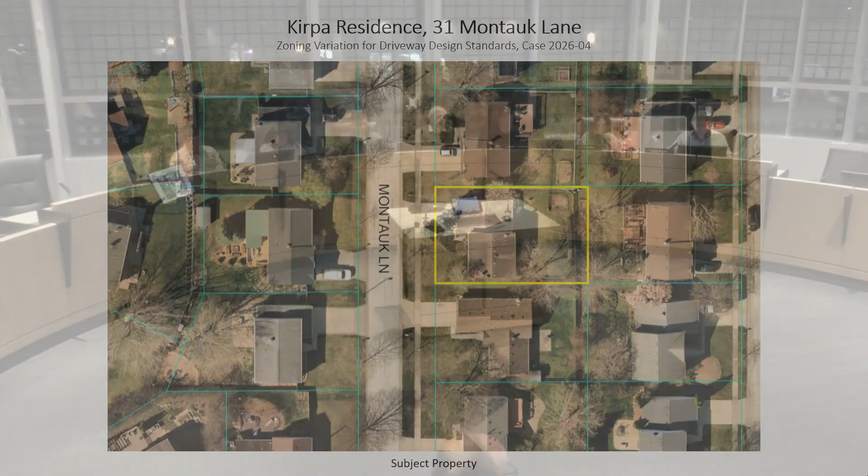We'd ask that you first tell us who you are, give us your names. So I'm Aga Lukawiecka. I am a part owner of AGSI Carpentry, and that's my husband, the other owner. And then I'm also the daughter of the owner of 31 Montauk Lane. I'm Barbara Kirpa, the owner. I'm Daria Mangas, architect.

Not that easily. And we have also looked - I think we were more prepared to show the homes that have a higher FAR, so we did prepare an exhibit that shows, just in the vicinity, there are multiple homes that do have that.

Just one quick note from the staff report on that point. When the petitioners presented this exhibit, I did look through our records and the county records to try to determine why there were so many homes that exceeded the FAR already. I'm not 100% sure, but based on the construction date of the houses in this neighborhood, they appear to predate the FAR requirement in the code.

So the FAR requirement is about middle of 1982, and many of the homes here were built before that. That is my best guess as to why certain models exceed the FAR even before any additions were done.

So we tried to pull some records. It was just hard to get an exact answer on the FOIAs. The only one we could get kind of an idea for was the one Aga was talking about. I asked for the current square footage of these homes we were looking into, and I was told the Village doesn't store that information, so we were told to look on the Lake County website map.

Yeah, that is true. On the Lake County website, the property cards will tell you what year they're built. Can you give me that address again on Manchester? Oh yes, 27 Manchester Lane. Okay, thank you.

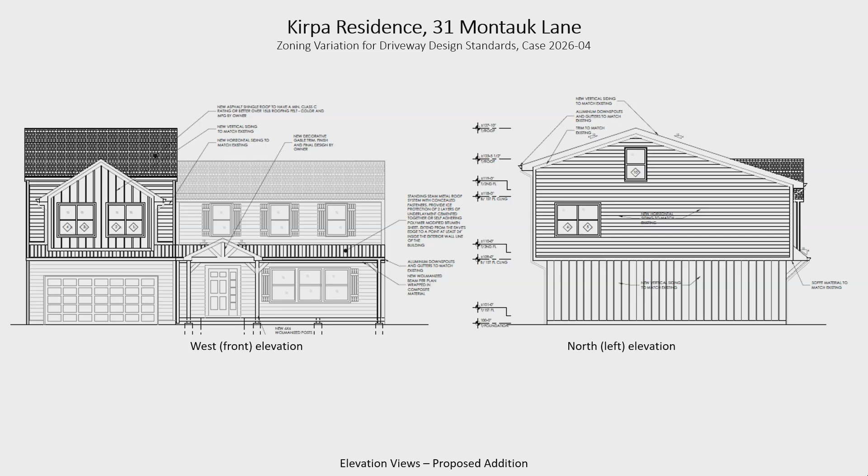The square footage of my home and your home are the same. Do you have an attic above the rest of the house, like above the bedrooms? Yeah, but it's very low, so we're trying to see if we can have storage where we can actually walk into and not have to be cramped.

We have an attic now on top of the garage that you can walk into and store more in, but it's low. Do you have a basement? I do have a basement. We don't have one, we have a crawl space. I was wondering when you said attic above the garage, maybe you didn't have one, but it's just a low crawl space.

Okay, thank you so much, that's why we're trying to be a little more comfortable with storage space. All right, thank you. Any other comments from the public? If not, we will close the public comment at this point.

Since this is your petition, you get the last word. Do you want to respond, please? What you should respond to is the consideration of other options, the single-family home assurance, as well as the issue of the roof line, which has been discussed previously.

Can I say something, please? So the hardship, the reason we're doing this, is obviously the market is absolutely insane. If you want to get a house with 4 or 5 bedrooms, you've got to be at least $500,000, if not more. Plus the rates right now are also through the roof, so we can't afford a house with that kind of mortgage at the moment.

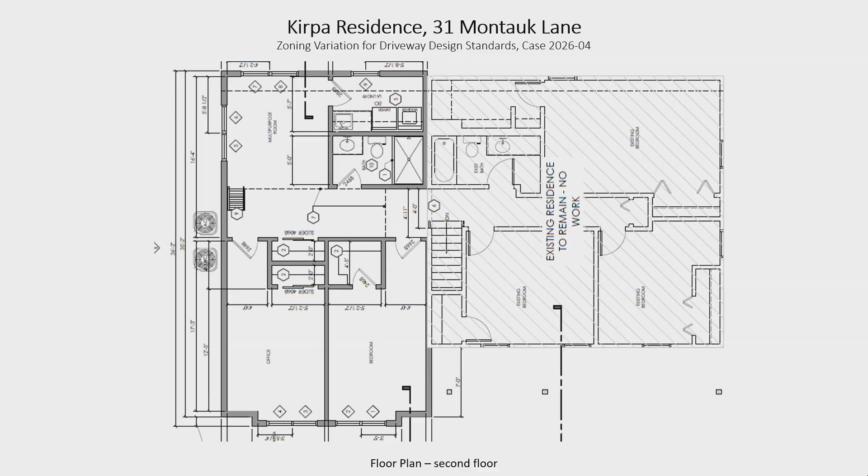Okay, so in the attic area, is the roof above that insulated? Yes, the roof above the whole house is insulated due to current energy codes.

It looks like it's 11 and 3/4, times about 19. So it's 223 square feet, the storage, in round numbers.

And the other one is... I mean, if this is the only thing that's going to stop us from an addition, we can close the whole thing off and just have it be attic storage. That's not like a 300 square foot game changer for us. We're more focused on the bedrooms and the bathroom downstairs.

Okay. Any other questions? Anything else you'd like to add? I was just saying that if that's going to stop us, then we can close it all off. Nothing else.

So did we decide that changes what the petition is? I can't off the cuff, just without reading all the code definitions that relate to this, say for sure. I don't want to hazard a guess.

So what we would do is, any motion we would make would have to be conditioned upon a finding to be supplemented by staff with respect to a verification when viewing the attic and the loft storage and attic storage, whether it is part of the square footage for FAR purposes, because that would affect what the floor area ratio would be.

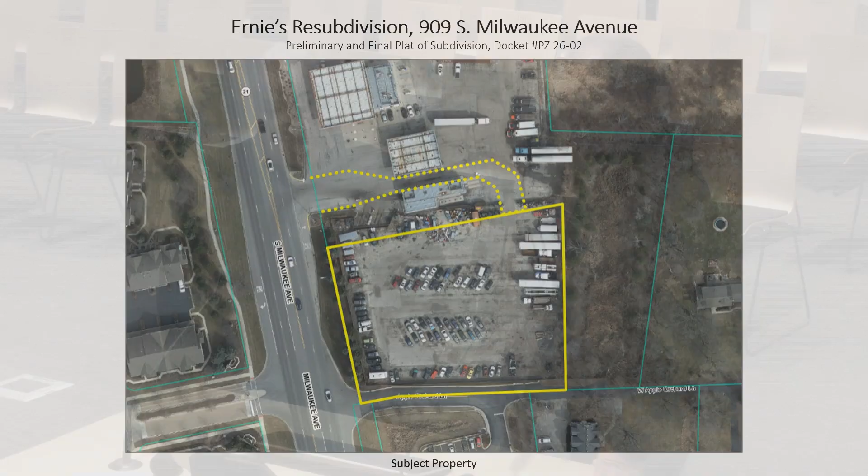The property south of the car wash, we started looking into - we were talking with the fire department and were pretty close on that deal, then they changed direction, as you probably know, and went further south. But that started opening up some thoughts with Ernie and his family, and he's now been approached by a few people. He's been basically truck parking there for the last dozen years or so, a long time.

So the thought was to maybe consider selling. Nothing's been signed or anything like that, but we've been approached by several parties. In order to do that, we started talking to Andrew probably 6 months ago, last summer or so, about the possibility of subdividing the 6.4 acres into two parcels. The main parcel would still be known as parcel 1, and the southern parcel would be parcel 2, which is 1.7 acres of vacant land.

We initially proposed a drawing that had a slight variance, but with recommendations from our counsel and Andrew, we thought it was better to come before the board with no variance request. So we made a few alterations, and what you're looking at now is an opportunity to create a subdivision of that one parcel into two parcels.

Roughly 4.4 acres and 1.7 acres of vacant land. The best thing that would happen with this, versus if that was ever sold out, for example with the fire department, we were going to have another access point on Milwaukee Avenue and potentially another off Apple Orchard. At this point, the proposal is that access for the 1.7 would remain the two entrances on Milwaukee Avenue, so we're not asking for any additional entrances.

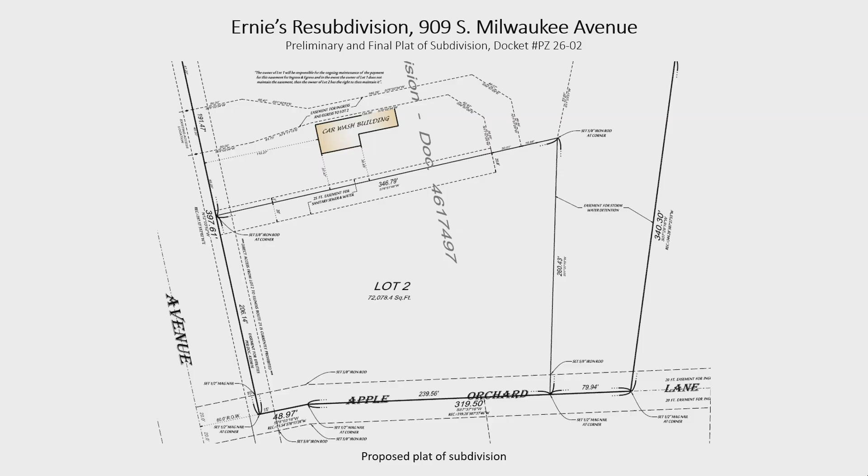Okay, any other questions? If not, we have a standing motion to recommend approval, which would be approval of the preliminary and final plat of subdivision in accordance with the development ordinance, to facilitate a subdivision of land establishing a 72,078.4 square foot lot, which is 1.65 acres, for the property commonly known as 909 South Milwaukee, along the dedication of access and utility easements as illustrated in the plat by R.E. Decker, dated December 19, 2025, subject to the following condition of approval, which is very important: the plat may be modified subject to the review of the village engineer and attorney. You ask, why is it important? Your plat has a specific legend on it referring to the Condominium Property Act and common elements. I don't believe this is a condominium. I don't believe there are any common elements. So your plat of Ernie's re-subdivision is going to have to be corrected and fixed.

Thank you, commissioners and staff. It's wonderful to see some of you again. I'd like to orient us back to the site location at the top northeast quadrant of the mall campus, to the Hawthorn Townhomes. We'd like to thank the Planning and Zoning Commission for the thoughtful feedback provided during the January 21st hearing. We have carefully reviewed the topics we discussed and have refined our site plan to ensure the project better aligns with the safety and traffic goals of the community. Each of our consultants will dive in further, but I'd like to offer a roadmap of what we'll be covering today.

These are our four program updates. The first being the Building 9 egress and ingress. We'll show a building update for the new buildings 9A and 9B. Topic number 2, rear-to-rear alley offset parking and parking ratio. We have a better visual and understanding of why this is important to us. Number 3, the AMC median planting and irrigation update. And number 4, the sidewalk connectivity and grade transitions.

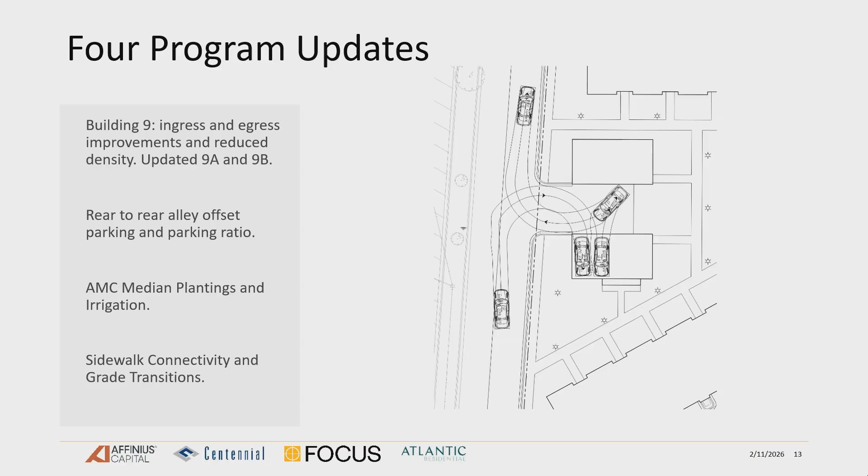Going to program update number 1, Building 9 ingress and egress improvements. The Commission expressed concerns regarding the safety of vehicles exiting directly out of Building 9 onto Hawthorn Center AMC Drive. Specifically, the design utilized 3 reverse exits, which presented potential visibility and traffic flow concerns for that roadway. As shown, this revised site plan contemplates a central drive aisle, which is 24 feet wide, between a new separated Building 9, hereby named 9A and 9B. This modification will increase sight lines, improve vehicular and pedestrian safety, and internal maneuverability.

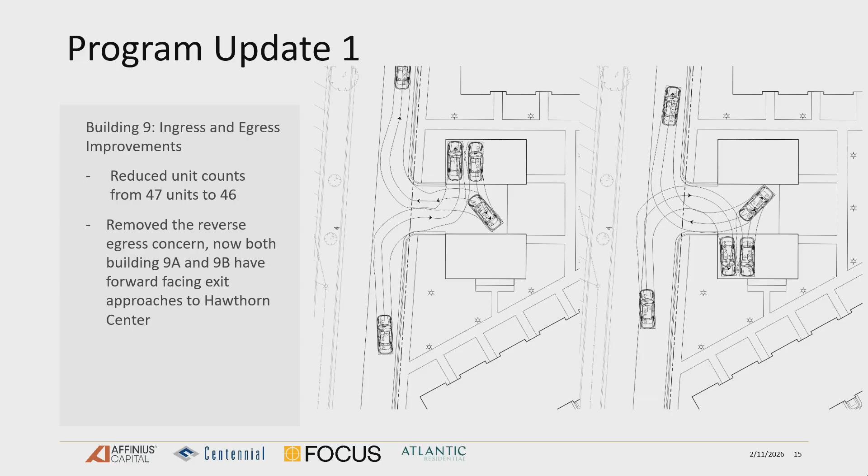In short, we will be able to use the center drive aisle to maneuver so that all reverse movements occur on the townhome property itself. This plan revision will also alleviate the concern expressed by some of the commissioners that the garages open directly to the AMC drive. These garages now face inward to the shared drive aisle, conforming with the design of the other townhomes in buildings 1 through 8, which also face inward. I will now hand this off to Jeff Mulcrone, who will talk about the architectural updates to Building 9A and 9B.

Good evening, commissioners and staff. As Sheila mentioned, we took the 3-unit building that used to be there and separated it into 2 individual row homes, so the middle unit is gone. We now have these 2 homes essentially on the site. When we did that, we had to look at the architecture as well to make sure these function well and are aesthetically pleasing towards the west. What you see on the screen here are the elevations that would face the west. Normally in the past, those would have garage doors on that face, so we turned the garages 90 degrees, and now the garage entrances are on the side, and the garages face each other. Presenting to the streetscape are now some small windows into the garage. This presents a nicer streetscape architecturally for that fenestration there.

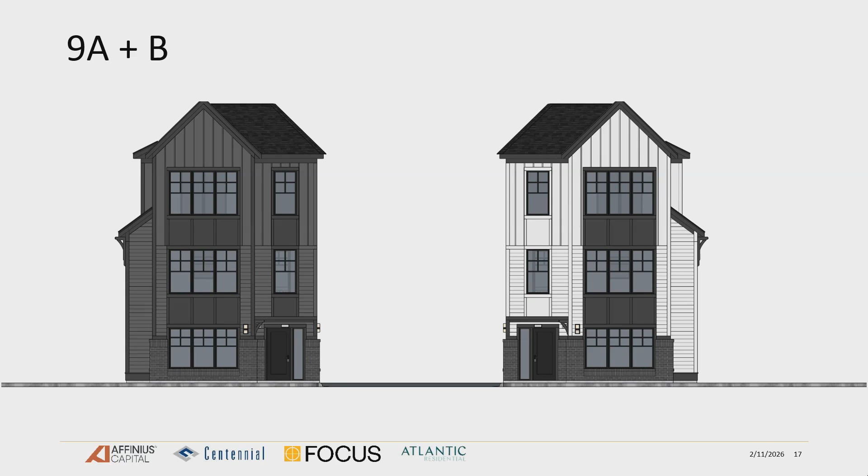And this is the east side of the buildings that faces the internal courtyard and park. It's very similar, all the architecture is substantially similar to the existing design that was presented last time we were here. Same materials, same color palette, it's just the architecture is a little bit more refined to create these two unique homes on the site.

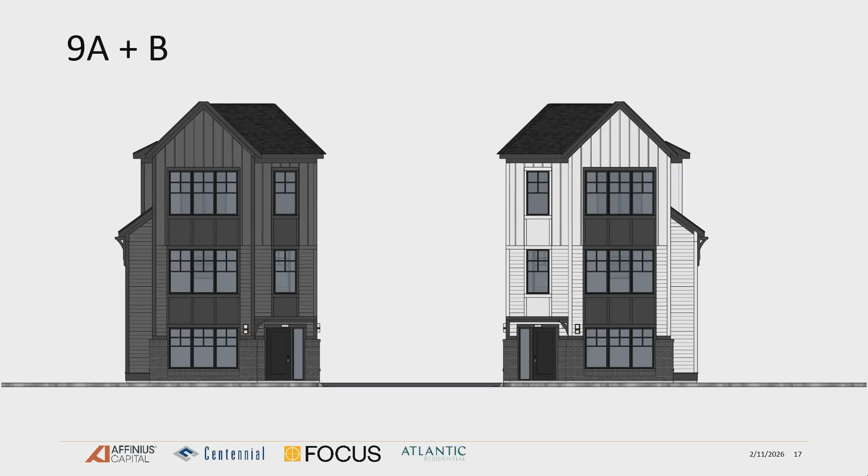While you're on this one, do you happen to have the separation between the 2 buildings? I believe we're 24 feet. 24 feet? Yeah, so there's enough room to back up and maneuver and then drive back out.

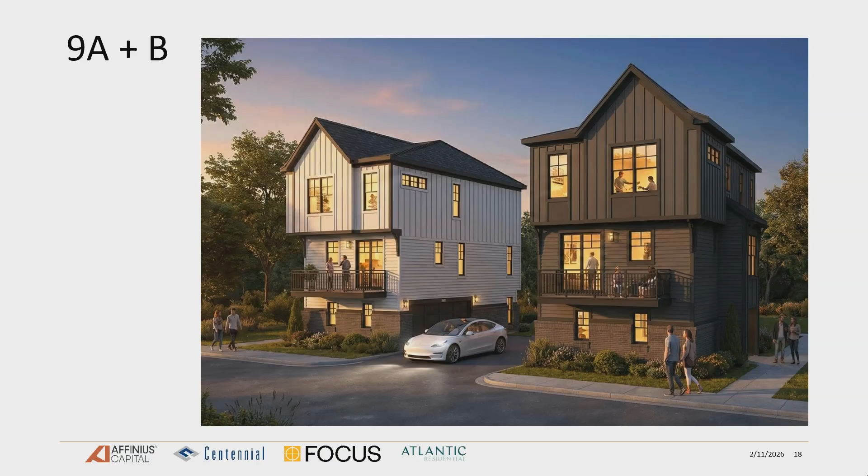And how many units are in each of those buildings? It's just one unit. It's a 3-story single unit, so it's essentially a home. There's 2 units there, so we did drop 1 unit. So you're now at 46 for the property. Is it 46? 46. Yeah.

And the balconies on both of these face the AMC parking lot versus the grassy areas internally? It's just the way the units are designed. So on that middle floor, these are normally like a rear load unit, and so those balconies are off the kitchens, which are to the rears of those plans, yes.

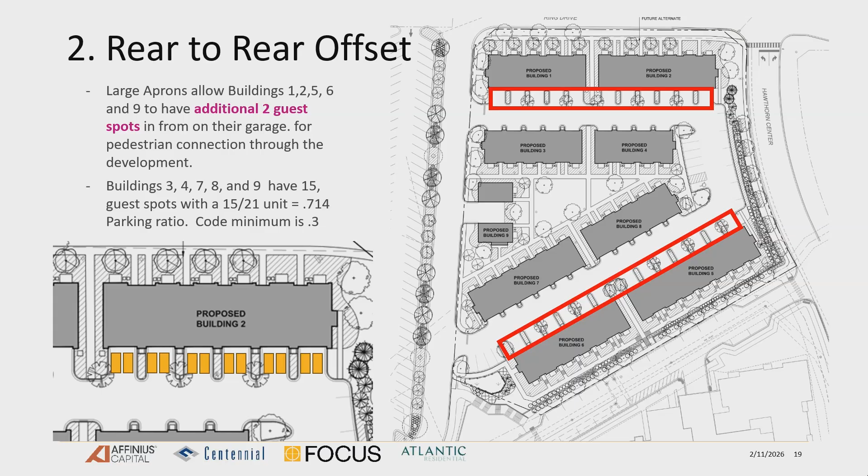One question - looking at the graphic, it says large aprons allow buildings 1, 2, 5, 6, and 9 to have 2 additional guest spots, and then it says buildings 3, 4, 7, 8, and 9 - 9 is listed twice. Yes, good catch. It should only be in the second one, that's included in those 21 units. Yes, you got a sharp eye.

Good evening, I'm Catherine Talty, landscape architect, and I'd like to address the median that runs between the development and the AMC Theater. We discussed this at the last meeting and talked about the durability of the plant material intended for that area, so we reevaluated the species that were specified, and importantly, the fact that we were leaving some areas of turf in the median, which raised concern about the health and vigor of that plant material if we were not to irrigate.

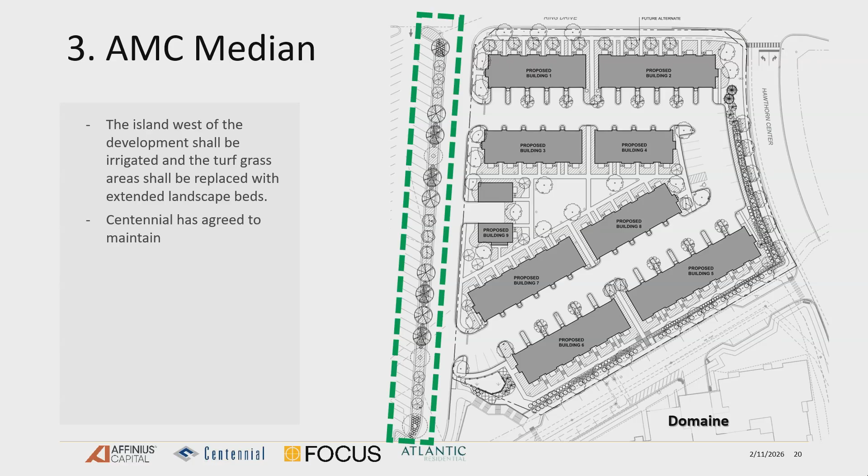So we reevaluated the plant species and specifically chose ones that are very durable and drought tolerant - native grasses, hardy perennials, and a few woody shrubs that can tolerate this environment. We feel confident with the plant palette, and Centennial has agreed to maintain the median to make sure the landscaping remains healthy and viable. Though we feel this could survive and thrive without irrigation, the developer is open to the idea of irrigating that median.

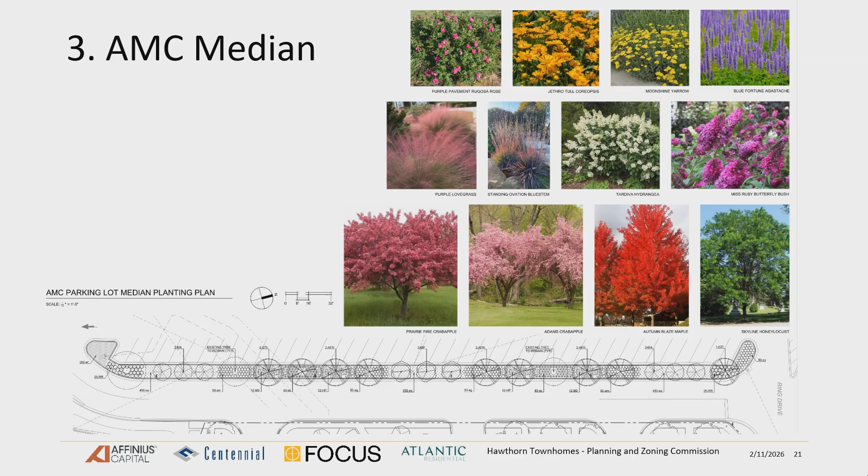How wide is that median? It's actually fairly wide - I believe 12 to 15 feet. Is the island crowned at all, or is it flat? It's crowned. And we're going to essentially rebuild that grade once these are installed, so we'll maintain our place and the soil.

What does 'open to' mean - are they going to irrigate it? We had put a note in the staff report on this, which is one of the questions I had in reviewing the supplemental materials. The note just indicates that the mall would agree to maintaining it. If this development were to put it in, it would be fed off the mall and become the mall's maintenance responsibility, since it's fully on their property. So rather than have some other agreement requiring them to go off site, the mall would agree to take it on.

Any other questions? So they're maintaining it, but if something dies out, who's replacing it? Centennial has stated that they will take full ownership - winterization of the irrigation, power for the irrigation, and tapping off their own water line for that irrigation as well.

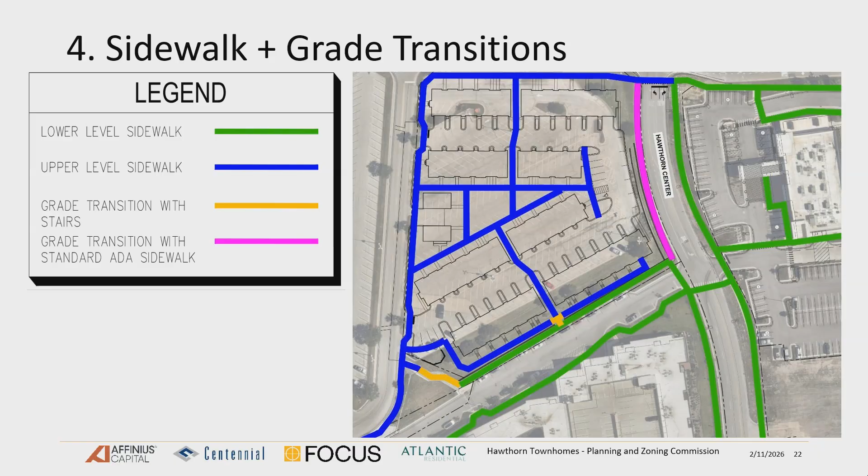Can you confirm again that it's the southwest corner of Mall Drive and Hawthorn Center where that radius is being pulled back? Yes, that'll be the same. The radius is increased, and we did truck turning movements for that one as well. That won't impact any of the sidewalk - we're redoing the sidewalk up there anyway.

Okay, anybody else? Anything else on your behalf? I think so, thank you. This is a continued public hearing, so if anyone from the public wishes to speak, this would be the opportunity to do so. Seeing no rush to the podium, we can close the public hearing portion.

Andrew, maybe you should confirm what's actually before us versus what we've already decided. Can I ask a question first? Sure. Tim, I think that was your name - you presented an image of the garages. I'm not sure what you were proposing in that picture. Were you proposing a signage change there?

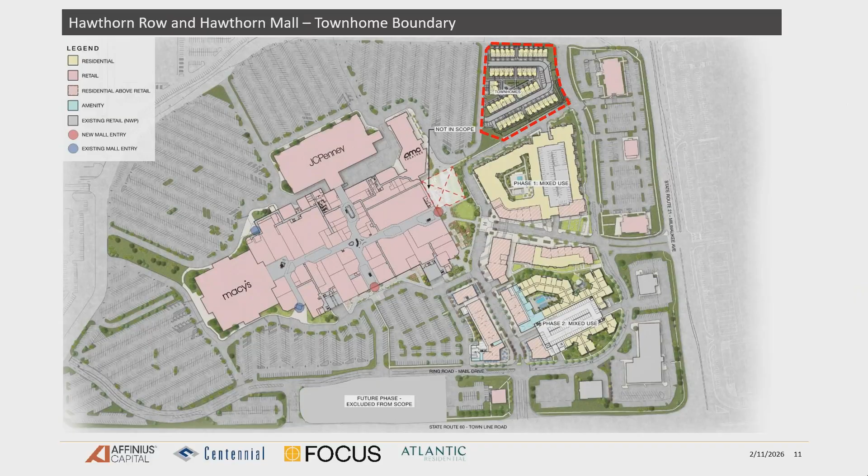Yes, I'll go back to that slide. These are the proposed ongoing improvements to the parking and wayfinding signage campus-wide. I have a printout here, but it's 30 signs - specific wayfinding signs throughout the mall campus - to help increase awareness that this is public parking, this is for retail parking, this is to be utilized, because when we've seen surface lots full, the garage is completely empty and open, and people don't know to utilize it. So that's something we've taken the onus on, that we can do a better job of communicating.

So these are the improvements and the proofs that will say public parking will be illuminated, and there'll be wayfinding throughout the campus. Are there sections and signage within the garage to direct the public to their areas versus the resident areas? Yes, I didn't include that one, but there are specific signs saying directional sign to this shop or that shop throughout. This was a condition of approval when the Phase 2 relocation came before the commission as an amendment to the PUD.

It was just a vague suggestion at that point. This is a more specific response, so you can actually see what it is they would be doing. This comes from walking the site with the development team before the Phase 2 relocation hearing, going through these types of suggestions and pointing out how the branded parking signage is really difficult for the public to read, especially at night. Our thinking is that this should help immensely to let people know that the public parking exists.

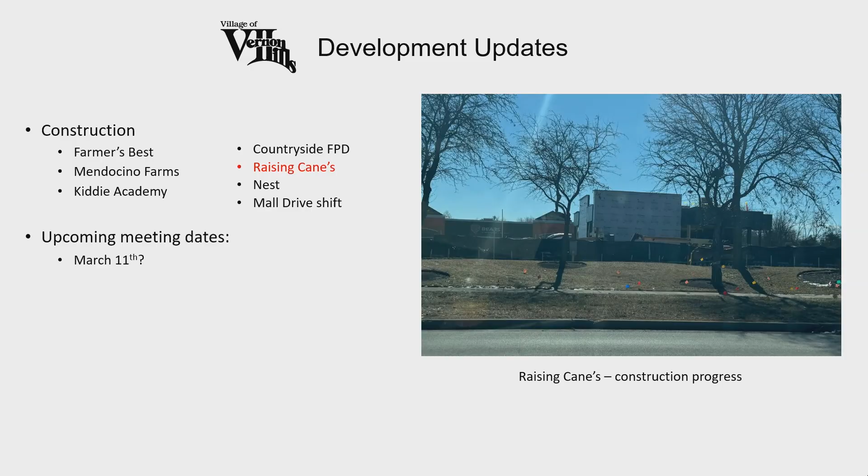I do not have a hearing to publish for March 11th right now. I was holding that in case we had to continue anything tonight. So at the moment, there is no new date. Thank you all for responding to the poll. And that's it for me.

Wasn't that supposed to be a First Watch? Yeah, it was supposed to be the First Watch. They couldn't come to terms on the lease with First Watch after several attempts. They are viewing that as most likely not moving forward, and they're talking to other tenants.

What's happening at Route 45 and Port Clinton? That is a very exciting underground project. There's a company in the South Lake Industrial Center that makes the GLP-1 injector. So they make those.

It requires a massive amount of electricity. That building does not have it. So ComEd's contractor is connecting, I want to say 6 miles of cable to supply power to that building. And the section going underneath Port Clinton and 45 is just complicated. It's difficult, there's a lot of stuff there.

Do we have anything for data centers or anything? We don't. We don't really one way or the other. I think in light of this news, that particular business required an $11.5 million project. It seems unlikely, but yeah.